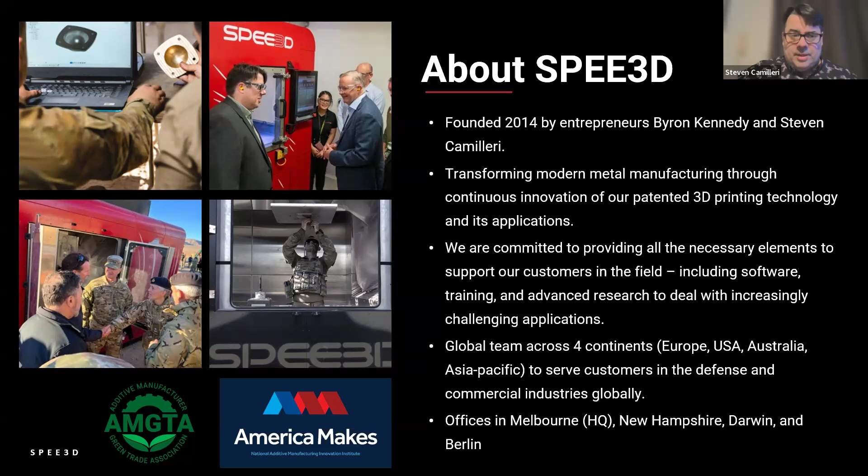So we didn't start in cold spray, we started somewhere totally different. I've got some pictures here of where we actually started. SPEE3D is our second company together for Byron and I. The first one was in electric motors.

This is a technology that came out of our work with solar cars, solar powered racing cars, where we had a world record for a little while. So what you see here is a swimming pool pump motor, which is boring, but includes a very fancy permanent magnet motor, which is derived from the back wheel of our solar car motor.

We shrunk it down, commercialized it. It's in production. We built the production facilities ourselves.

So, in short, we were tech guys that got bought out by a large manufacturing organization based out of Wisconsin, Indiana, in the US, and we went to work for them. They taught us how to do production. They made us set up the factories for these electric motors, which was an absolutely wonderful experience for tech people.

To be learning about manufacturing. And so this is our background, was this pump motor, which reduces your swimming pool power consumption by 80%.

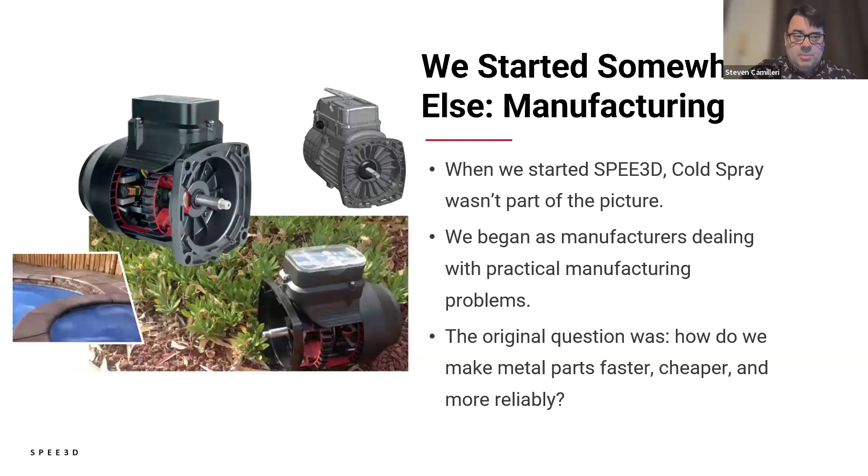It's actually a huge saving, enormous amounts of cost reduction for that new technology. It's kind of changed the world in swimming pool pumps, which is the saddest brag you can imagine. But there you go. So here are the problems that we knew in that industry.

So there's a large motor, it's called an integral horsepower motor. If you've ever been in a pump room or an elevator room, you've probably seen something like this. Very standard technology called an induction motor, invented by Nikola Tesla a long time ago.

So those motors include a lot of cast materials. By that we mean we take a molten metal, pour it into a hollow, let it solidify, and we pull the part out shaped like the hollow. So lots and lots of electric motor parts are made by casting, steel or aluminum usually.

As a result of working in electric motor tech and building factories, we had to learn a lot about casting. So much casting. The problem with casting is it takes a lot of tooling, there's a lot of lead time, it's very painful to change, it's not a very flexible process, and it can be quite hazardous. You've got to be very careful with it.

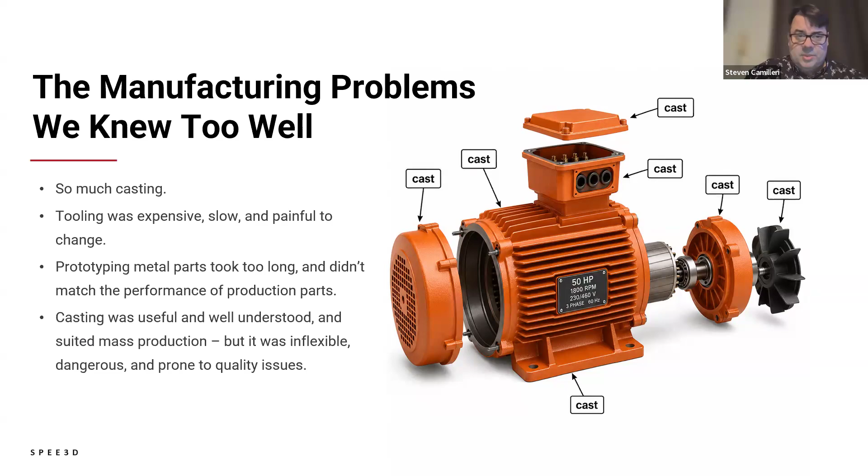So it's wonderful for mass production if you're doing the same thing every day. Car manufacturers have a lot of success with casting—they're making the same thing over and over again, every 15 or 30 seconds maybe. But when you're making stuff in a slightly lower volume with a lot of part mix, like electric motors, everything's a bit different. The front's a bit different, the size is a bit different. You're having to cast different things all the time, and it was a big problem. This was a big part of our life, dealing with this problem.

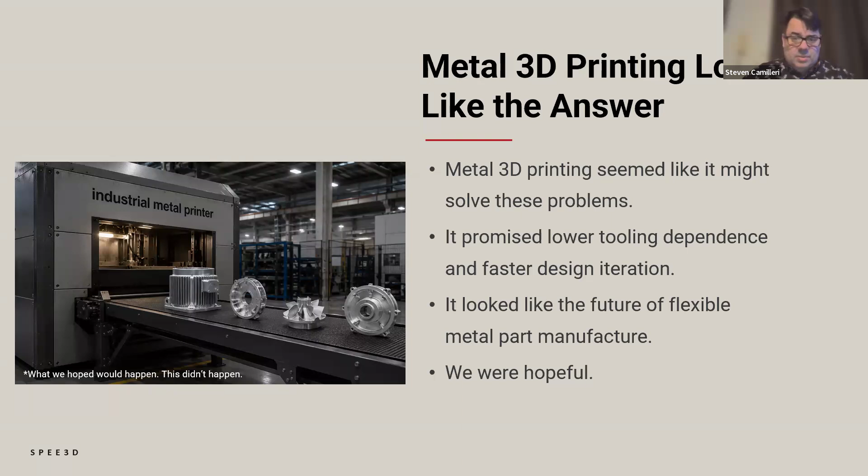So at the time, around 2013, we thought metal 3D printing looked like the answer. I made a fake AI image here of what we thought might exist, which is a big box—you just tell it what you want, and out comes the stuff on a conveyor belt. What we were really hoping was that metal 3D printing was going that way, and we could start to replace some of what we were doing with casting with a more flexible process that didn't require long tooling lead times. So we thought, let's get into this and see what we can work out.

So we tried it. It was very exciting, it was a lot of fun. We made a lot of prototypes. They generally worked pretty well, but it was just way too slow and way too expensive for solving normal manufacturing problems—we're talking orders of magnitude out in terms of feasibility. So that was quite disappointing.

We also noticed the parts looked pretty good. I've got some example parts on the table there, but they weren't normal parts—they were kind of thin-walled, small. Often you had to use lattices and things. You couldn't just make a big chunky metal part like we were used to for an electric motor. So for us, it was a bit disappointing.

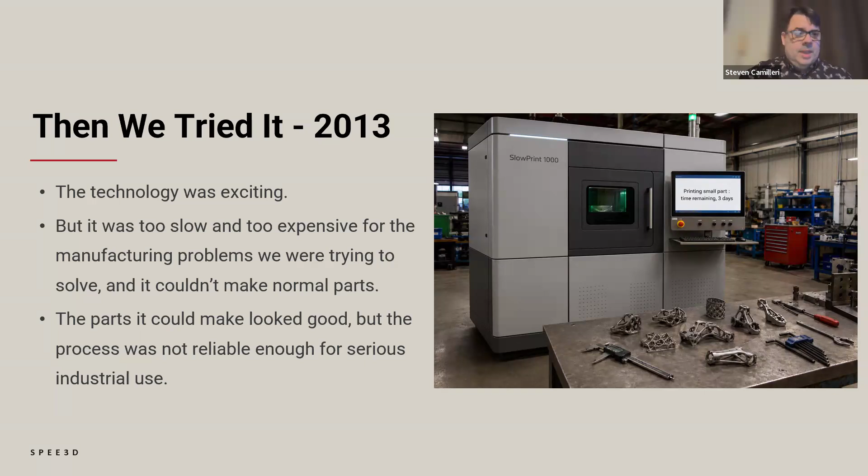So we thought, well, maybe there's an opportunity here actually. So we thought, let's get into metal 3D printing—what a great idea. Here is a lovely image. Most of you are probably watching the fancy video here and not listening to me, but I'll explain anyway.

This is a cross-sectional view done in a synchrotron with X-ray of an SLM style powder bed fusion process. You're looking at a powder bed and a laser going across the top, melting that material. In fact, you see it's not really a very nice process—you can see the particles jumping out, the molten globules jumping out, the powder going everywhere. So it leads to problems like lack of fusion and weld spatter inclusion. That's kind of how the process works.

For very small parts with thin walls, it's pretty good actually, and indeed they're getting better at using it—10 years later, they're getting better in other applications too. But this process of having to add heat until the material melts, wait for it to cool down, then add more material and add heat again to incorporate it into the part—there's this kind of thermal pumping cycle. You're pumping the material up to a liquid state, waiting for it to solidify, then adding another lot of material and pumping that up to a liquid state again. It just added time and energy. We noticed that seemed to be where all the budget was going—into this cycling between liquid and solid. So we thought, this is not going to work.

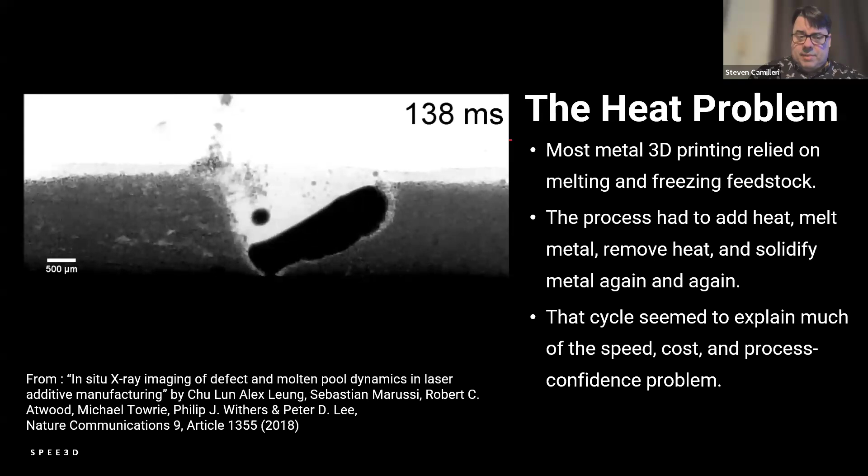We can't develop this tech to a point where it'll suit a manufacturing problem—physics won't let us because of this problem with the thermals. So we thought what we really need is a process that works in solid state.

So can we make metal parts without melting metal? So this was really the question that we went after. So we thought, well, if melting's the issue, then let's just figure out a way to make a solid metal part without melting the material. Easy, right? So we had a look around.

We thought something like powder metallurgy. So I've got a little description over here. You take a cavity, you fill it with metal powder, you press the metal powder down, and you eject this gear. Indeed, a lot of gears are made this way with powder metallurgy.

I've got to be careful talking about this because I know Brad's an expert in it, and he'll bite me.

But you take the metal part out, it's green, it needs to be heat treated to fully solidify and densify and shrink. But this is a way of making metal parts without melting the metal. So it is around. So what we need is something like this, but without all the tooling. So if only there was some way to combine all the powder together into a solid metal part without having to melt it. And we kind of despaired because we couldn't find the process.

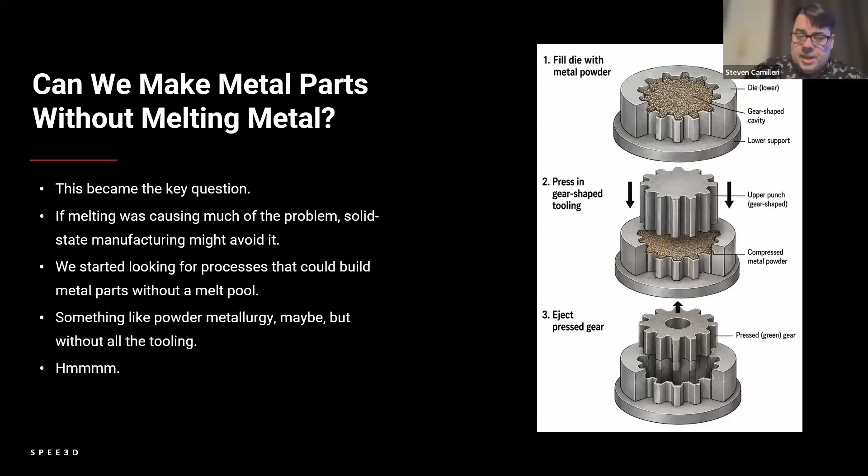Although I'm sure there are many people in the audience who have a suggestion. So, not a lot of practical candidates. Ultrasonic sheet welding, explosive bonding kind of came up immediately. This is 2014. None really felt like they were going to work for a kind of a production application. So, it's a little bit complicated. So we thought, if only there was a way we could do this.

Eventually, we found a really obscure reference to a thing called cold spray in this very, very old translated Russian paper. And we thought, cold spray, is that a translation error? What's this cold spray thing? So we looked around and looked around and we found out what cold spray was. And we thought, wow, this is actually the right kind of technique. Interesting. We looked a bit further and we found the CSAT community and we thought, wow, this is actually something a lot of very clever people are thinking about all the time.

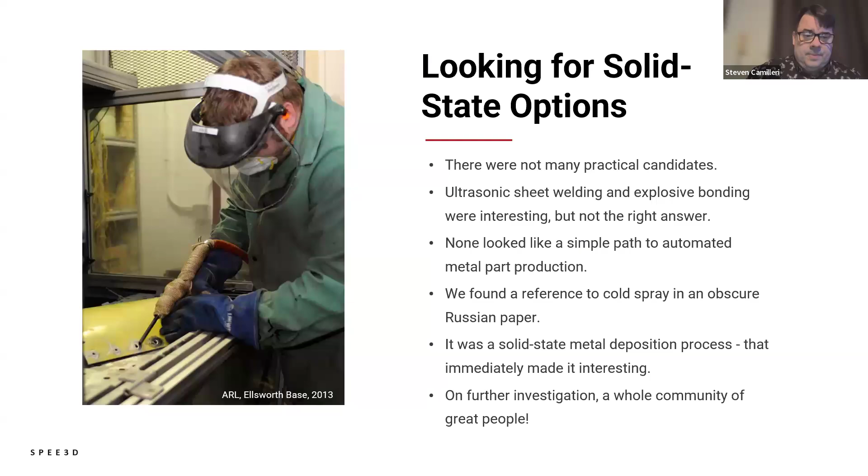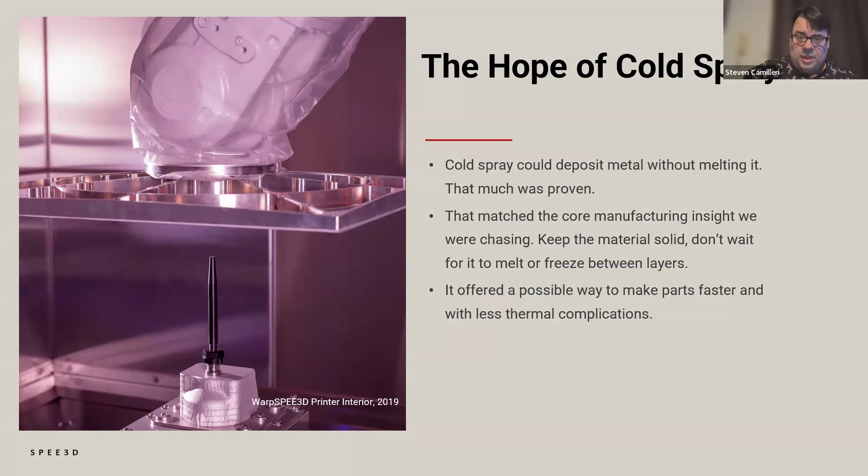This is wonderful. So, what we really needed to do was find this new application for it where we weren't just talking about manual repairs, building small structures, but actually trying to build really cheap, really fast metal components. So, our hope for cold spray was that we were going to be able to deposit the metal without melting it. That's good. But if we can keep it solid, we're not going to need to melt any of that metal. Great. Let's spray it on. Let's build the part up. Sounds feasible. Okay, good.

Here's where the problem came in. The problem was cold spray is a stochastic process. That's a fancy word for random. So there's a very random element to it. We're not controlling where every particle goes. We're controlling sort of a distribution of the particles. The way that the deposition method works is complex. It's a function of what you're spraying onto, what you're spraying with, velocity, temperature. There's quite a lot going on there.

It was solid state, but this whole idea of just being able to generate layer upon layer and stack them up was not really something that cold spray did. Cold spray liked to taper in. It liked to decrease in kind of layer area with every succeeding layer. And so we thought, right, we've got some work to do here.

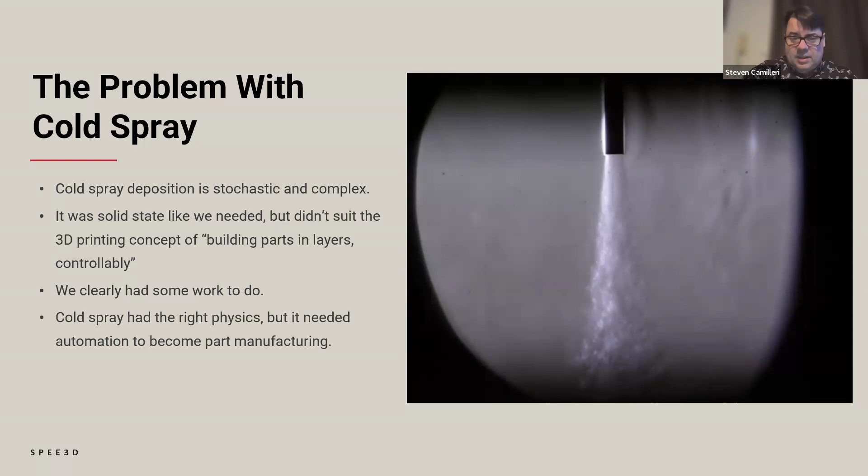So the good news was we were already people expert in real-time control, manufacturing, robotics, control systems, all that mathematical stuff. So we thought maybe there's a way to do this. We looked around quite hard. We didn't find anyone who seemed to have cracked this yet, but we were pretty determined.

So there's another artist's rendering of kind of our crazy idea. Let's take a robot. Let's automate the robot. Let's put a cold spray nozzle in there and let's have the robot generate the geometry repeatably and reliably. But that turned out to be quite a challenge. So really, when you think about it, you're trying to take these little tiny splats, which have this distribution, in a circular pattern, and you're trying to turn that into a repeatable construct, a repeatable geometry, by automating the process kind of really exquisitely. And indeed, that turned out to be quite hard.

So we worked out we needed to automate really every part of the process. We needed to manage every part of the process, control variabilities. The business of manufacturing really is about controlling variabilities, understanding where things can be allowed to vary because it might be cheaper or more convenient, and where you need to control them or you're not going to get the outcome you want. That's really the science of manufacturing. So we applied those same techniques to cold spray, and we spent a long time thinking that this wasn't going to be possible, actually. But nevertheless, we persisted. This was a very difficult process.

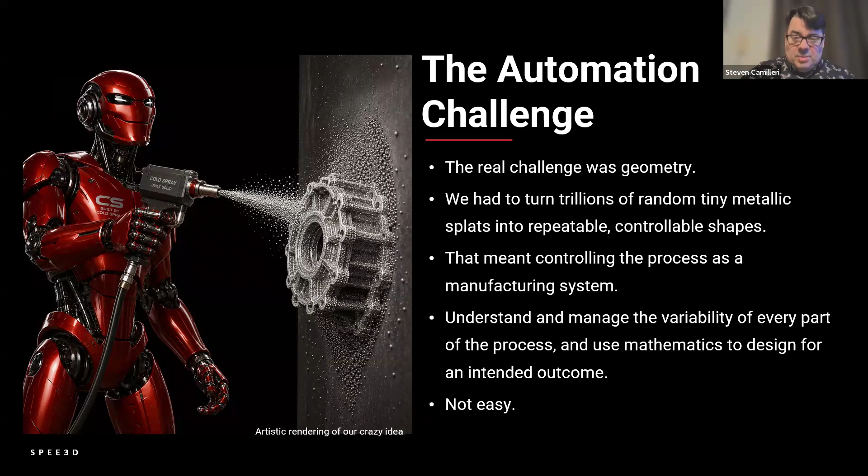So we worked out that we had to build everything at once. We had to build the machine, we had to build the nozzle, we had to build the robotics, we had to build the software, all the automation for controlling everything safely. We had to build all the simulation tools, all the compensation tools, all that real-time control. And really, we had to do all this simultaneously in order to get that predictable, reliable outcome that would allow us to be able to deterministically manufacture something every time we wanted to.

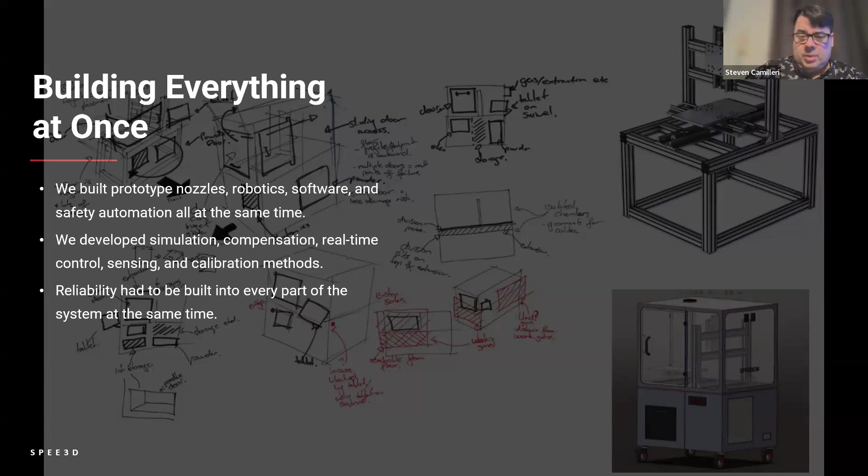So there was a lot to control. Fortunately, we had a very good team, and this was kind of our background, working in these very kind of multi-physics type problems. So what you can see here is one of our very first printers. We call this one Blackbird. We've still got the prototype in our office. Anyone who comes to our office, we'll show it to you. It didn't work. It was missing some very important features that we worked out we needed, but we learned a lot. We learned what we needed to know by doing a lot of work with that system.

So in our old office, we had this wall. It was probably about 20 feet long. We're just showing a small section of it here, the wall of failures. So trying to automate cold spray led to a lot of very interesting shapes. I'm sure we have a lot of people on this call who are expert in manual cold spray and know how to generate geometries. My hat's off to you guys.

This is a process that's not particularly intuitive, I think, and it's a real skill to be able to do that work. It's not like painting, which is relatively straightforward. You're just essentially making a two-dimensional sheet. Cold spray, what you're putting down depends on what's already there. And it's quite complicated, actually, to predictably make something.

So we had some fantastic looking parts. They weren't useful parts, but we had parts that looked like they'd been eaten by termites. We had parts with spikes and growths all over them. And indeed, we had to work out why that was happening, establish controls, and spend a lot of time iteratively developing those automation processes so that irrespective of what geometry was being thrown at the system, we didn't have those kinds of failures. So there's a huge amount of work, a huge amount of labor and effort in this.

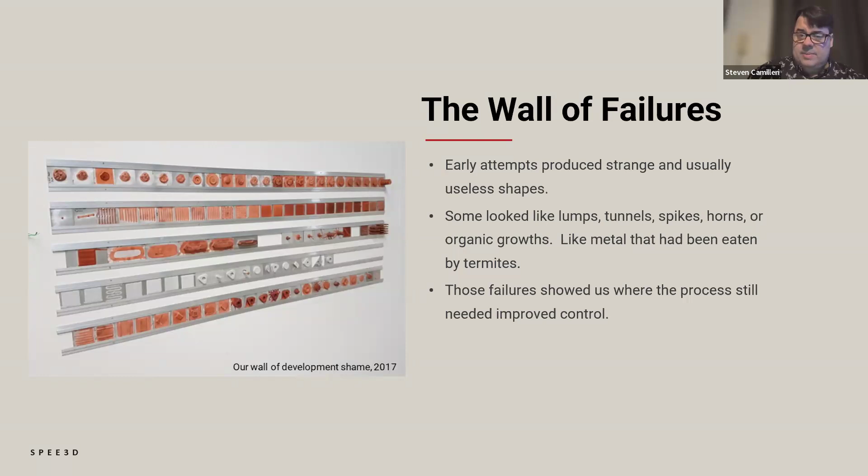So this was our first big success, 2016. It's a cube. So it's a pretty unimpressive, ugly little cube. It's only a centimeter, so it's about half an inch to a side. But the walls are flat and they're at 90 degrees to each other, and indeed it has edges. And the edges are relatively sharp. So it was a crazy amount of work getting to the point where we could make this ugly little cube, but we were very, very proud of it.

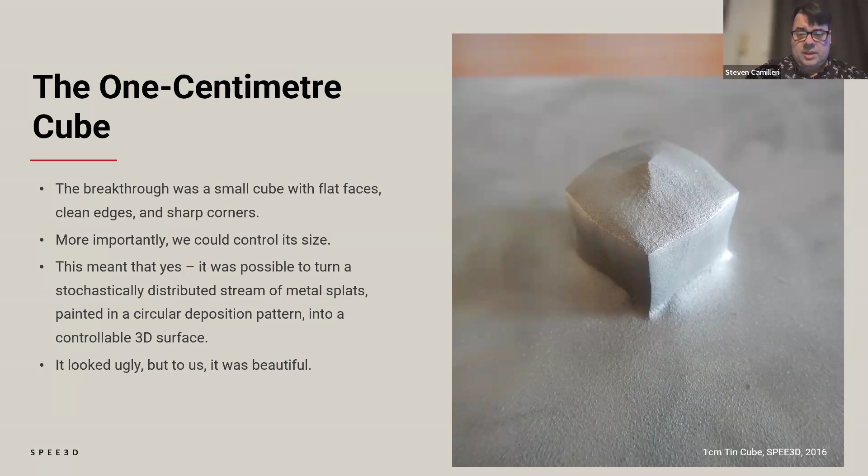So most importantly, we could make that same cube over again. We figured out how to make the top flatter. And indeed, if we wanted to make another one, it would look just like this one. And if we wanted to make a larger one, we could do so without knowing how to do it in advance. Our automation would allow us to do that. So that was our first big success, probably about 10 years ago, as we sit now. And it was tin, of course, because our prototype nozzles that were running in our garage were very low energy. So tin, you can just about sneeze tin together. It really doesn't need a high velocity.

All right. And about a year later, we brought out our first product, LightSPEE3D. Some of you know this product well. This will make parts up to about 10 pounds. And this was us taking all of that tech, compacting it into an artifact and wrapping it up in a way where people could easily engage with it. So indeed, you could take a part that the process had largely never seen before, and if it met the design rules, you could print it fairly quickly. So why could you do that? Because of all the automation. The automation is really what allows you to do that.

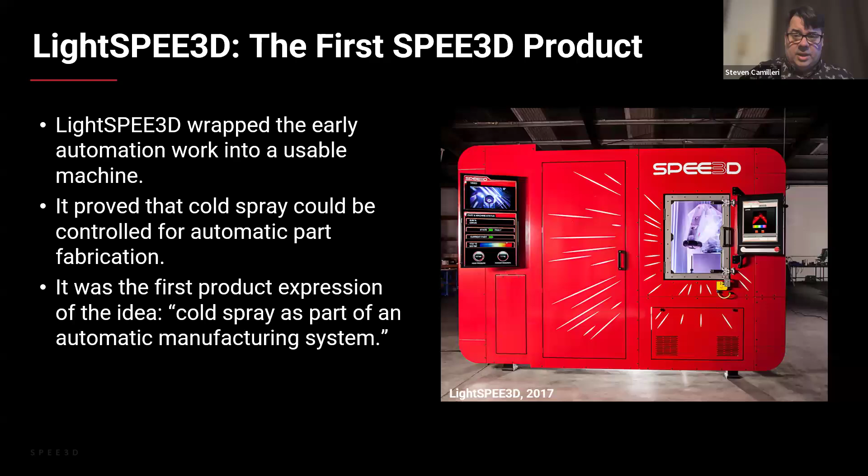So generally, here's how the process works. Our objective function is to compact the time from need to the part being available as much as possible. So that includes the design time, the setup time, kind of project time, as it were, the printing time, but also the machining time, the heat treatment time. So generally, we heat treat and machine every part that gets made with our process.

So we print that, we stick it into a furnace, we cook it to improve the alloy, very much like you would do with powder metallurgy, and then we finish it with machining. With our new high pressure systems, which you'll hear a little bit more about at CSAT, we don't need to heat treat as often, but many of our alloy systems work extremely well with heat treatment, and usually that's the right answer.

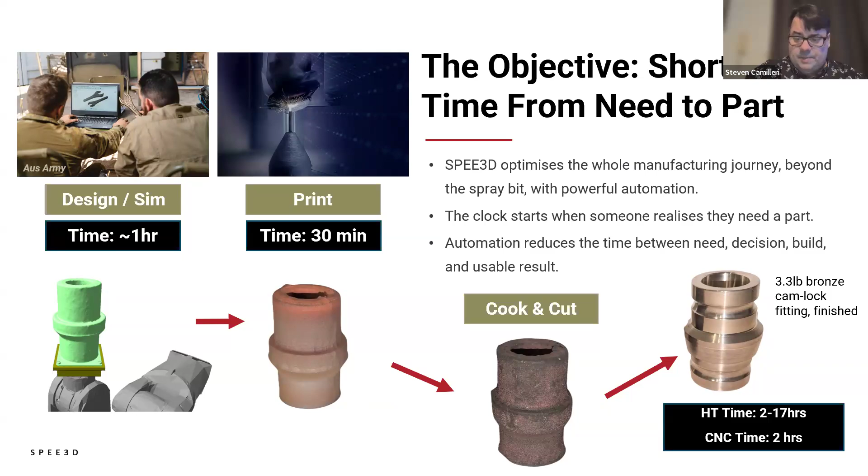So let's talk about TwinSPEE3D. TwinSPEE3D is the name of our software. Those of you that have our system will know TwinSPEE3D well. It's really our PC software that allows you to manage the workflow for the printer. So you would do all your part locating, and you would do all of your simulation with TwinSPEE3D.

So we have two primary workflows there. One is for printing, where you take a geometry that doesn't exist and then you make it exist with TwinSPEE3D. Or in fact, you can take a substrate geometry, which is usually just a flat plate, add the part you want to be on top, and then have it generate that part. The substrate doesn't actually have to be flat. The substrate can be a part already, and you can make another part joined to it. TwinSPEE3D doesn't really care.

Separately, we have a coating workflow. When we say coating, it's not really the same thing that you would normally do manually, for example, with a cold spray nozzle. With coating, we would normally take a shape that already exists, which can be a fairly sophisticated three-dimensional shape, and we can use the printer to apply a coating automatically, like paint that surface to a given thickness. We don't use that workflow as often as I think is justified, but nevertheless, it's something that the software does, and it does solve an interesting set of problems to be able to automatically paint like that.

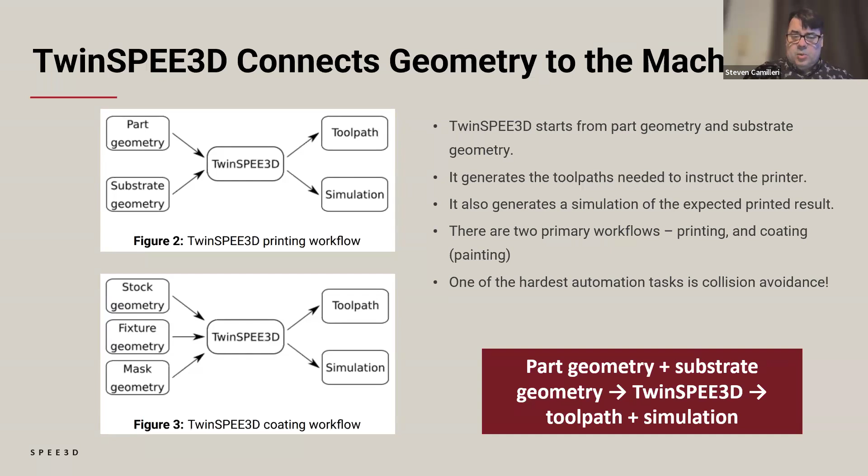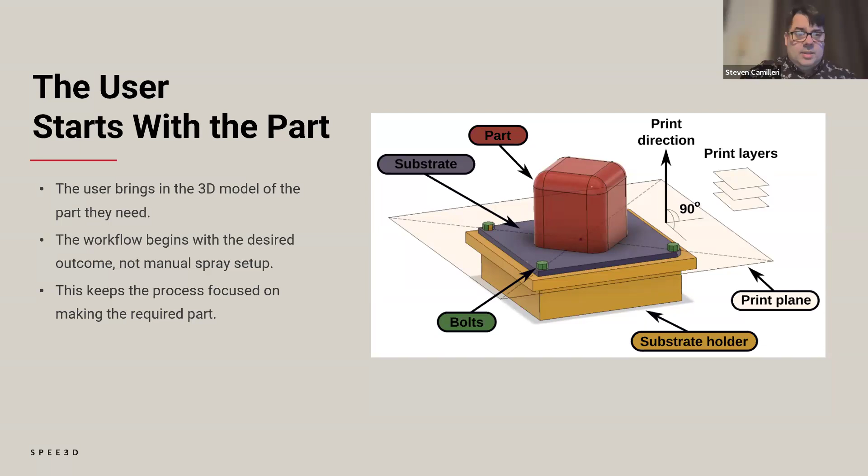So interestingly, the substrate is part of the process. It can be a plate. It doesn't have to be a plate. For example, if you had a small statue of a dog and you wanted to print a hat on top of that dog, maybe in a different material, you could do that by bringing the dog in as a substrate and then adding the hat on top, and it would automate that workflow for you.

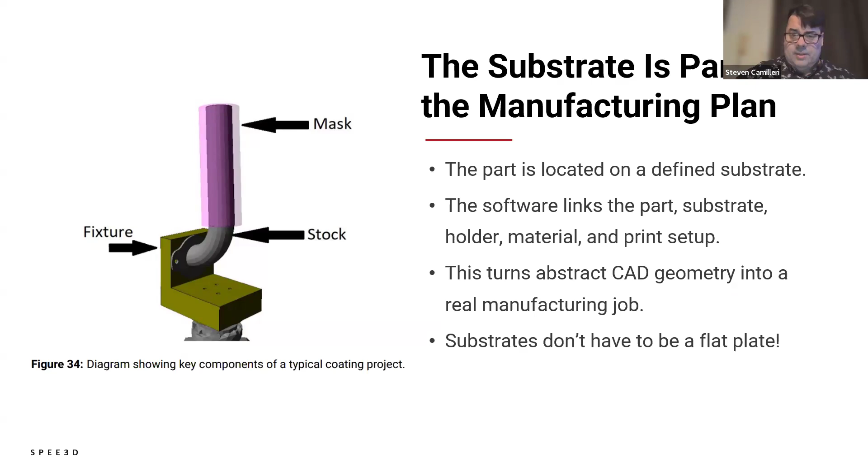We also have automated design rule checking. So there are design rules. We have a document in the manual that talks about what kind of geometry is allowable. As you build up, what angle can you build outwards at? Because if you're building up and you're building very close with a tiny gap flat to the substrate, that would be very difficult to do. You'd need to get the nozzle around behind the substrate to achieve that, which causes an occlusion issue.

So what's the process for building that part up, and indeed, where are their limitations? Sometimes it's difficult to intuitively tell where in your geometry there might be a limitation. So we've built automation into TwinSPEE3D directly, which will do design rule checks and then highlight the areas of the component where there is a design rule failure, and you can change the geometry prior to printing just to ensure that it does print properly.

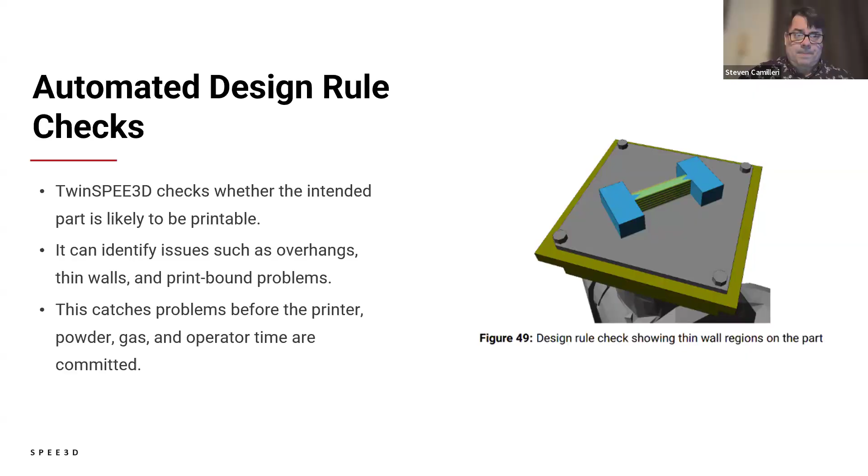So this is a genuine part that we made recently. Someone was leaving who used to bring their dog in regularly, so we made a statue of their dog for them.

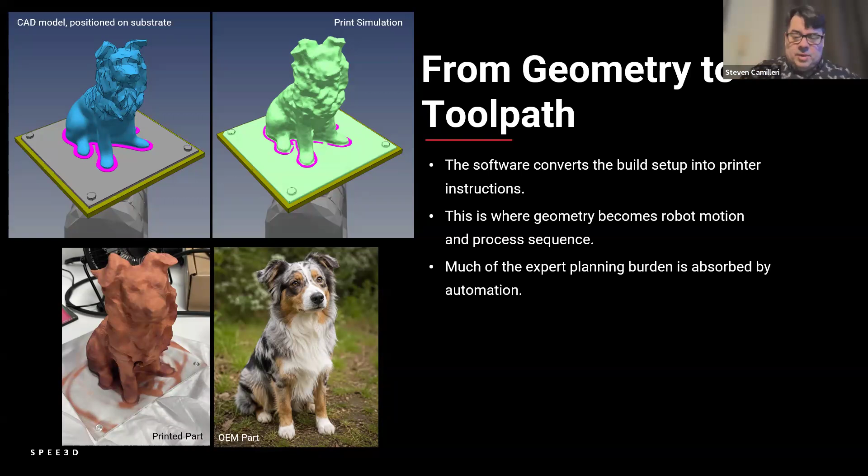Bottom left, you can see there's a copper dog statue that's been printed, which matches that green simulation quite closely. It's a slightly different angle, but it does indeed match. And then, of course, we've got the reference design down there at the bottom right. So, yeah, the simulation turns out to be quite an important part of the process.

So the real challenge here is most of the time, our technology is asked to make a part that already existed before. So, for example, we're making a fitting or a coupling or a bracket or something, some sort of armored vehicle component. And the people who originally designed that component wanted to solve a particular problem, and they had certain manufacturing tools at their disposal, which were not cold spray.

So we have to re-engineer that part. We have to solve the same problem, but we have to switch to a cold spray manufacturing process in order to make that part. And the people who originally thought of the part didn't have that same constraint. So we need to solve the problem, generate the new geometry that's cold spray printable that solves the problem.

And the simulation is really useful from a point of view of, it's a very complex, intractable problem. What's printable? We've got all this real world problem to solve. And indeed, tracking what's printable and what's not beyond intuition is very difficult. So having the software deal with that for you is quite helpful.

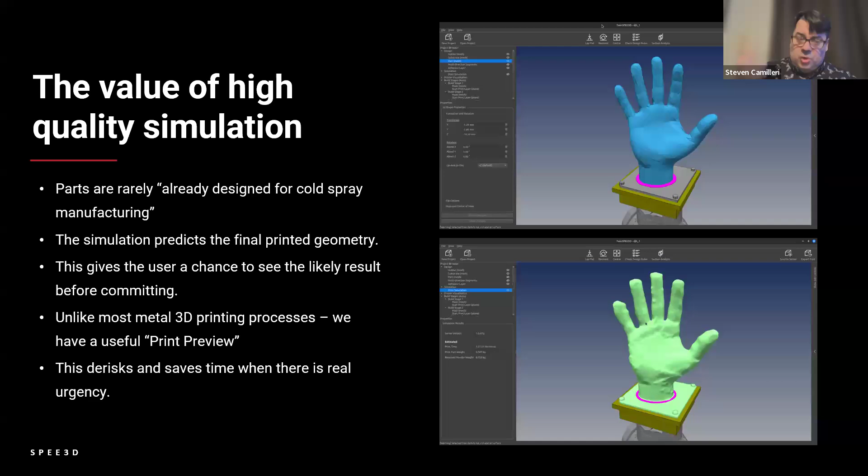So the print preview tool, essentially the simulation, is kind of a what you see is what you get. So you can very quickly say, what if we tried this? Does that part simulate in the way I expected? If I were to have that in my hand, could I solve the problem that's in front of me?

So most metal 3D printing processes don't have that print preview, which to me just seems off. If you really want your metal 3D printing process to be helpful, you should be able to predict and tell people what it might do, just as you would with a word processing package. So really, it's all about generating the answer to that problem very quickly.

So you'll see also in the top view there that blue hand, the original CAD, is a lot more detailed. This is a very small part. It's only about this large, and indeed, the resolution of the nozzle is limited by the inside bore of the barrel.

That spot size of printing is right on the edge of what's really printable with that nozzle size. But you can see down the bottom there, it's done a pretty good job replicating that geometry, though not exact. Our automation process in general tries to overbuild the part, making sure there's more material than needed, because once it's printed, taking material off is relatively easy, but adding more is not. So we bias it in that direction. It doesn't always get it right, but that's where we bias it.

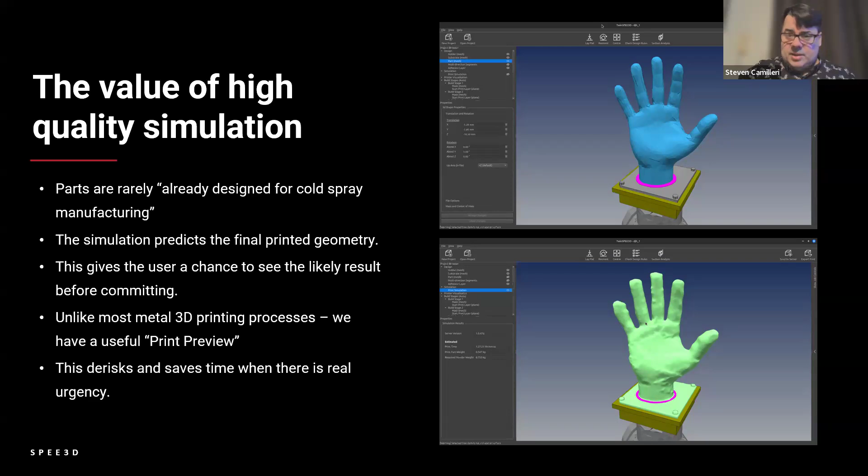So the simulated parts can actually be compared very directly with printed parts. The simulation process, again, isn't perfect, but most of the time it's an exceptional guidance for the real part.

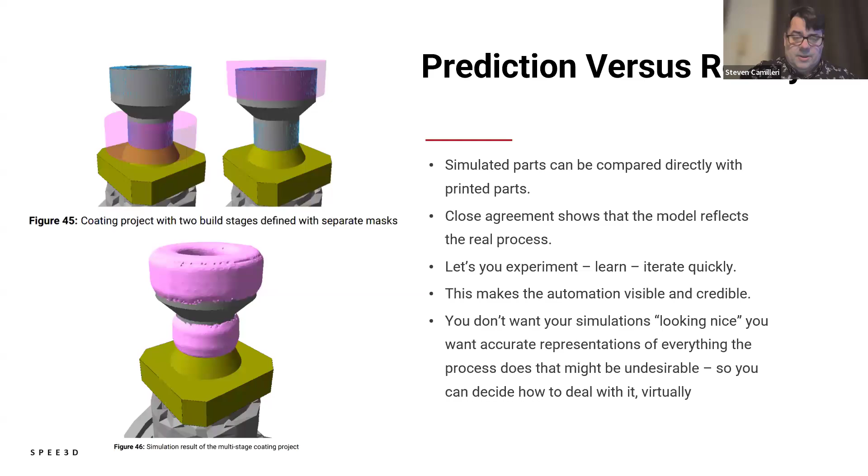So the automation really is covering a lot of ground here.

When you think about what's actually going on in the printer — in this case the nozzle is stationary and the part is moving around. For our WarpSPEE3D and XSPEE3D printers, that's how it works. For our very large format Titan printer, it's the other way around: the nozzle moves and the part is stationary.

But the automation has to deal with making the geometry — that's step one. Then making sure the geometry can be knitted together as intended. We've also got to account for all of those joints in the robot. How do we get all those joints in the right position so we end up in the right place? We're not tying the robot up in knots, and we're not driving it into blind alleys.

And how do we deal with things like collision? Collision is actually a very complex issue for an additive manufacturing machine because you're literally adding material. The system can collide with the material that it's added and destroy itself. During prototyping, this happened to us a few times.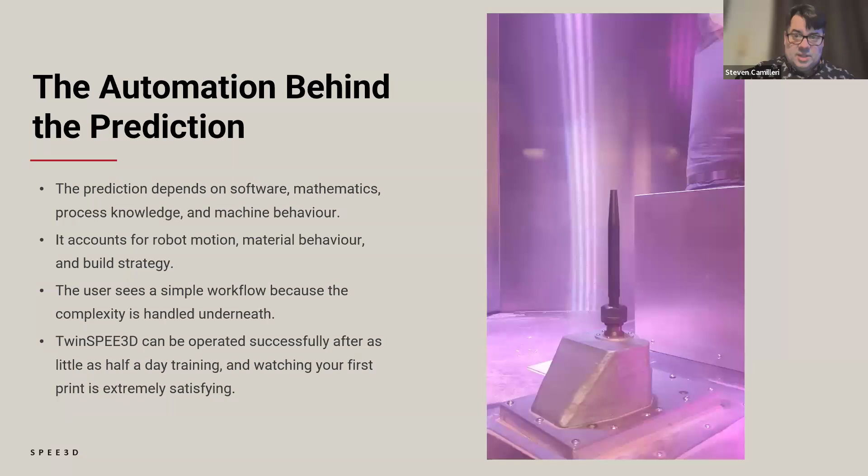Think about something like an FDM polymer printer — it builds up material very carefully in layers so the nozzle doesn't crash into the part; the nozzle's always got clearance. In our case that's not necessarily true because we have a 6 degree of freedom robot. It's quite possible to get that robot to crash into anywhere in the printer, essentially at any time. So we've got to manage that issue of collision as the part's building up. There's quite a lot going on under the hood, as it were.

Talking about geometry that's hard to build — we have a process called automated build planning. In the case of the hand, you can see that inset picture: the hand is split up into different colors, and every one of those colors is subject to a different build plan. The system will reorient itself in space, set up a new datum, and build up at a different angle. That's all done by automation.

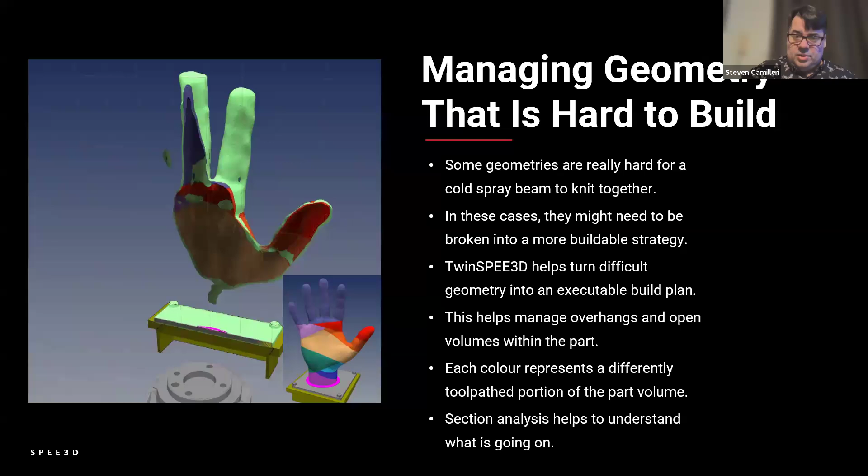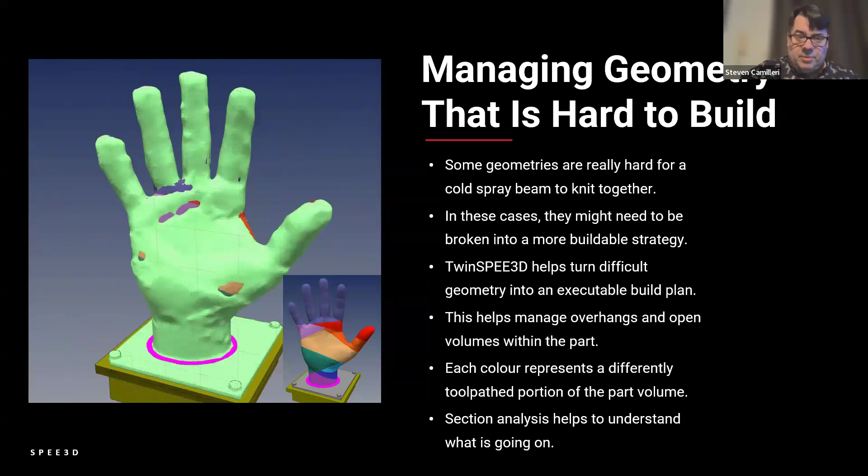We've also got section analysis — you can see us sweeping through there, and the different colors of those different build paths within that green. You can also see, when it resets, a few sections where the simulation is still lower and the underlying geometry is still showing through. Section analysis is incredibly helpful when you're in the moment, you haven't got a lot of time, and you've got to solve a problem: what is it I'm looking at, and where might it be a problem for me later? Being able to do that live sectioning is very helpful.

Our next element here is Harmonica. Harmonica is a code name for our user interface — this is what you see on the printer itself. We set it up to be three-dimensional, high refresh rate, and very visually appealing, really to make life easy when you're in the field. I've done a lot of work in the field — you're being attacked by insects, it's hot, you're sweaty and tired, maybe working under a red light. You really want the cognitive part of your job to be simple; you have a lot to worry about. So having a very well-designed, visual, easy-to-use interface is quite important.

So we call this part of the system Harmonica. Down the bottom there, you can see where it's located on an XSPEE3D. We'll have one of our XSPEE3D printers on display, I believe, at CSAT this year, so you'll get to see the whole process in action if you're there.

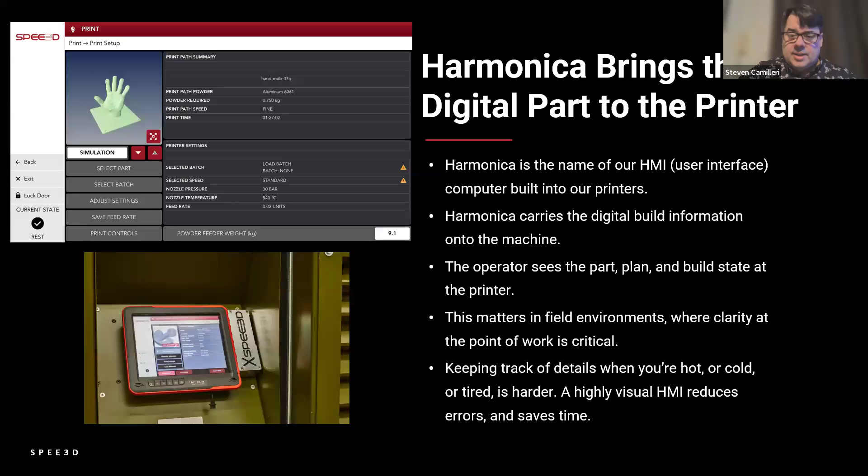So let's talk a little about the use of technology. Technology really only matters when it solves a real problem.

I've got this innovation adoption curve, or technology maturity curve, on the left here. This is off Wikipedia, there's a page on this if anyone's interested. This is the distribution of people in the world, and indeed, the people who love innovation is about 2.5%, 1 in 40, and 39 in 40 hate innovation.

So this is important to remember when you're trying to convince people to work with a new tech: most people don't like that change. So the tech itself doesn't really have value to people. People need the tech to solve a problem, and the solution has value to people. So there's a subtlety here that's important to know.

If we're talking about automation for cold spray, we really need to find those people whose problem it will solve. And in our case, it's urgent access to metal parts.

Just as an example, I like tech. I'm one of the 2.5% of people. I would adopt tech even if I didn't think it solved a problem yet. Most people are not like me. So example would be horses.

I quite like horses, I think horses are very interesting. I would never own a horse. I would probably ride a horse. I quite like being around them, but owning one is not for me. So I'm in the 39 in 40 for horses, but the 1 in 40 for tech.

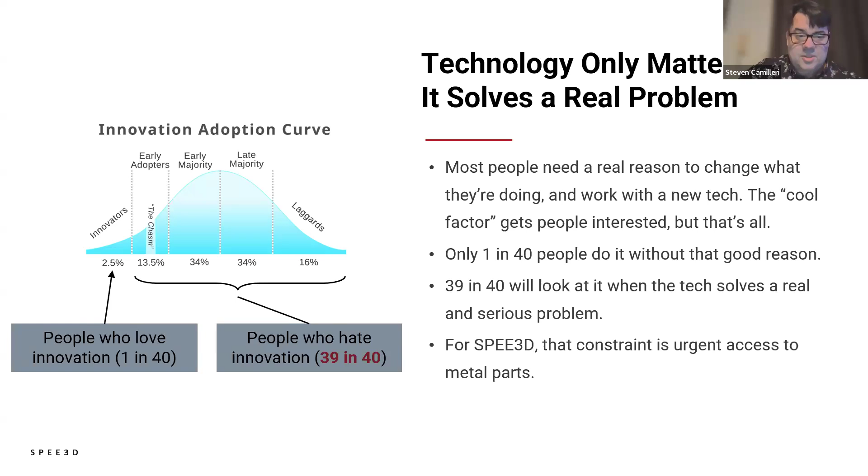So yeah, most people want the outcome. There's a picture of us out in the field, you can see what the environment's like where we're typically working.

The people that we're working with really don't care about cold spray at all. They care more about rapid part manufacturing, but what they really care about is being able to avoid downtime and loss. So solving that problem for them is the real answer.

So cold spray is a central part of what we're doing to deliver that for them, but it's not everything. Our automation actually is the part that they see and experience and value in the work that we do with them.

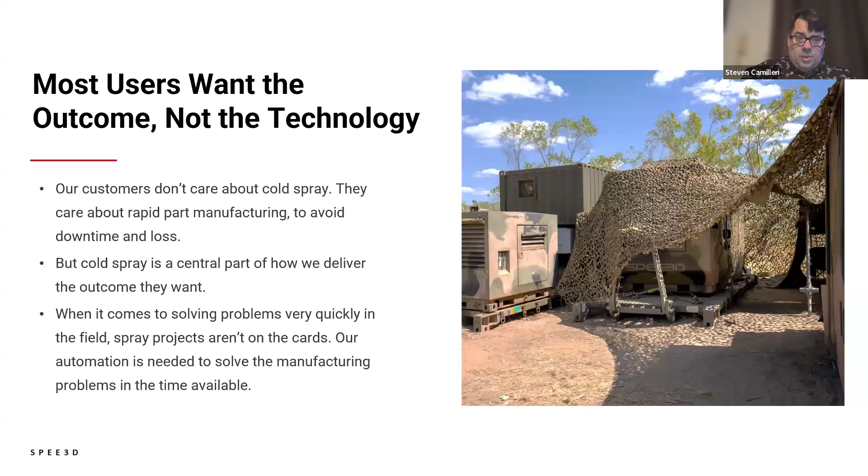By comparison, cold spray repair, cold spray coating, most people at CSAT are there for that. This is actually a totally different beast to what we do. So this is a fantastic thing. Whenever I see this picture of the S-92 Vic's work, I believe I'm very impressed.

But this is not what we do. Our system doesn't know how to commence surgery on that part, doesn't know how to prepare it, and indeed wouldn't be able to generate a custom restore like a manual operator with experience would be able to do. It's simply a different task.

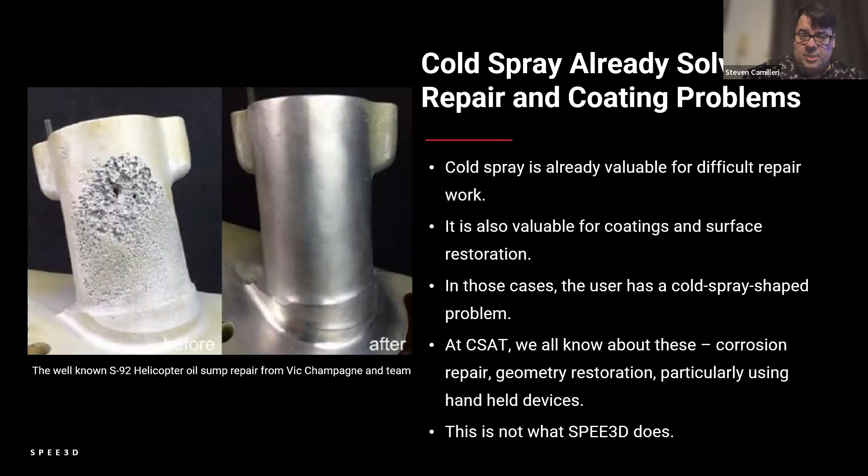So for reference, this is not what SPEE3D does. We don't work in this industry. What we do is go out with people who have limitations, who really need parts, and we provide them with a system that allows them to rapidly generate parts.

So there aren't too many people in that industry who are excited about cold spray. We are. What they are excited about is the automated manufacturing.

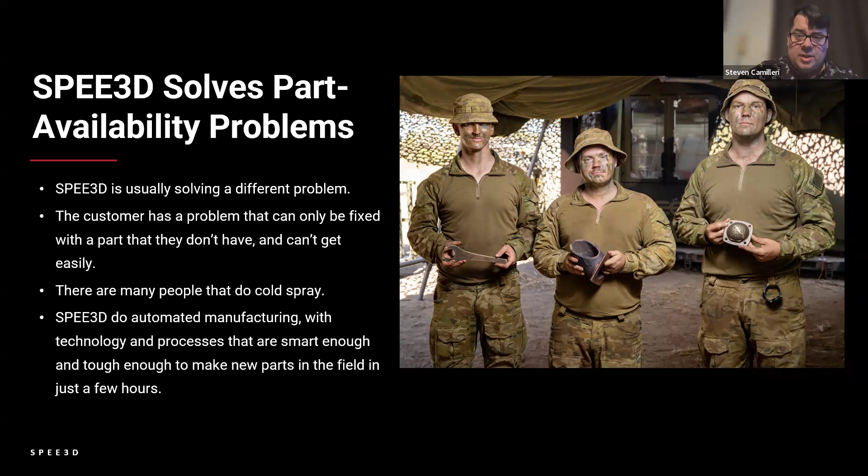So automation changes the answer. Really, it's about removing the burden of the operator. So the human's job is to work out what should be done.

That might change in the future, but right now: which part do we need? What's the priority order? And how quickly do we want it versus maybe how high a quality do we need the outcome to be? These are the kinds of decisions a human would make. A human understands the operational requirements, they will understand why you would do something.

Second point, our software and automation does all of that complex planning to create the part. So the how of the process is all done by that automation, so the person doesn't have to carry that load around with them, which in the field is very, very important. They simply need to understand what the nature of the problem is they need to solve and have the automation deal with the project element of it automatically and quickly.

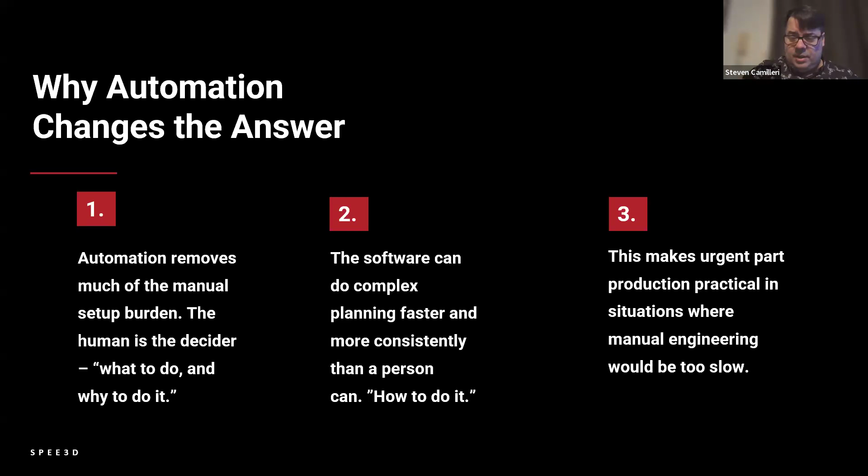So this really is a solution for those problems where the project type process would be too slow. So here's an example: we did this at REPTX down in San Diego in, I believe, 2022. So this is a valve body.

It's about this big, about 12 inches left to right, maybe a little bigger. So it was quite a hard challenge.

They essentially said, we put the system on a ship. We're going to pretend that the ship's been hit by a torpedo and that the seawater extraction system that would otherwise be venting the seawater from the hull has failed. There's a part that you need to generate within 4 hours or the ship will sink. We thought that was pretty tough, but that was what they wanted to try.

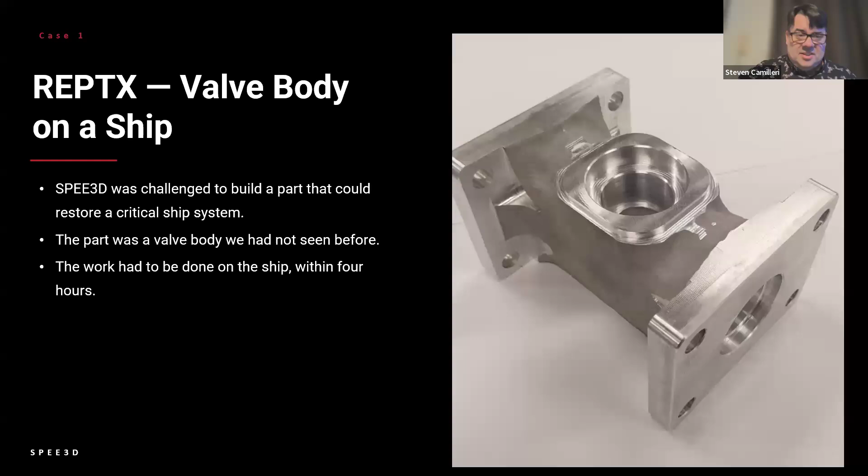They wouldn't give us the part in advance, so they started the timer and gave us this valve body design, and we were able to generate that within 4 hours on the ship. So printing, heat treating, machining, pressure testing, all on board the ship.

That was I'm not going to tell you that was fun. That was quite a stretch to be able to do that. But being able to do that is a new thing. Creating a custom part to save a sinking ship that you didn't know you needed before the ship was torpedoed. I think that's a new thing that didn't exist before, but we were able to demonstrate that we could do that now.

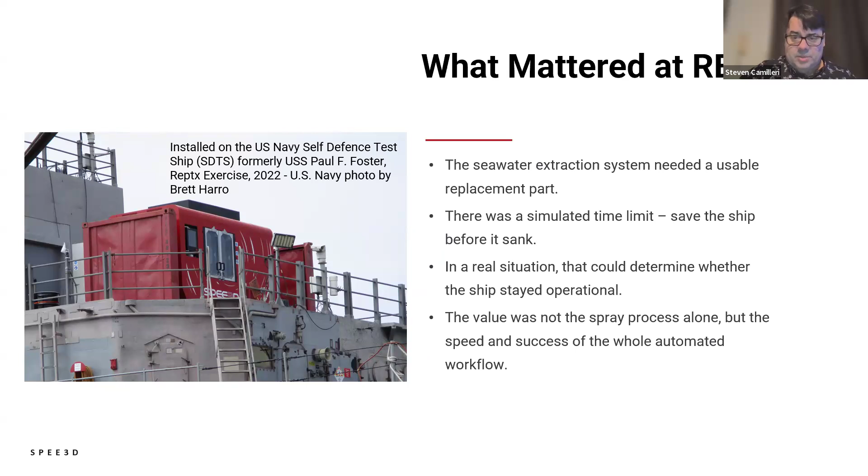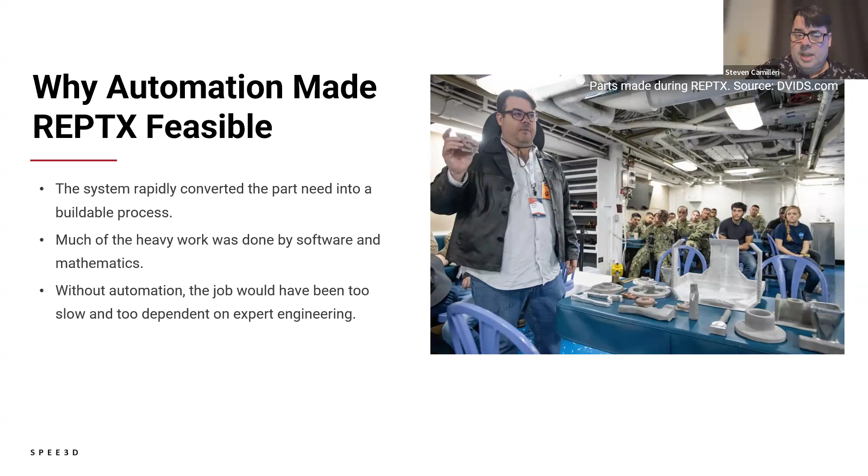The automation meant that we could solve the problems that were coming quick enough for it to be relevant, quick enough for it to be important. The software and mathematics really did all the heavy lifting for us. If we hadn't had that, even if we'd had our very best people there and they'd had all the coffee in the world, we wouldn't have been able to solve those problems in a period of time that was important to solve the problem.

Here's a second example. This is a tool we built for a platform called HIMARS, in Australia, a very remote part of Australia. There's a tool used to lock the wheel hubs on a wheeled HIMARS. It broke in the field. This was a critical demonstration, the very first HIMARS in Australia being demonstrated to the Australian government, and embarrassingly, that tool failed.

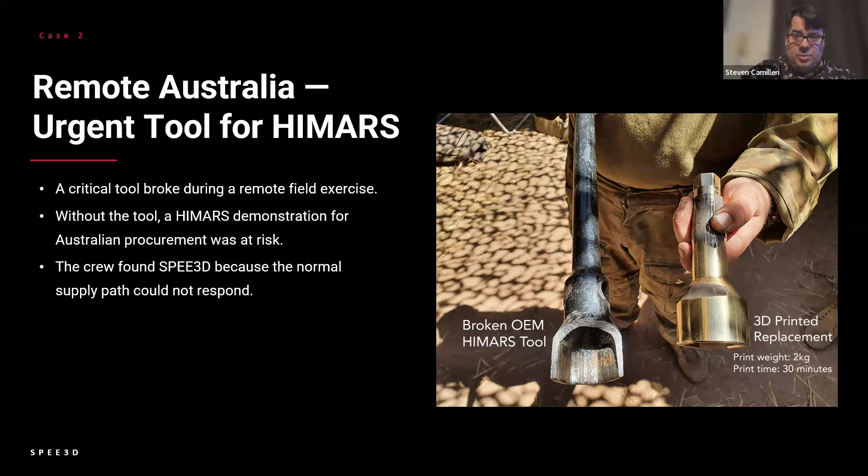It's got a nasty cast iron material, very brittle, and it had a checkered history. The first time I tried to use it, it broke. Without that, there was quite a lot riding on this test. So people came and found us and said, drop what you're doing and do this instead. And we were able to produce that replacement part.

Here's where that was, the Bradshaw training area, 400 miles to the nearest Burger King, just to give you a reference. In Australia, Burger King is called Hungry Jack's. Anyway, there's a long story there, but we do have Burger King, it's just not called Burger King. So 400 miles drive to get to there. This was really remote, right in the middle of nowhere.

And this platform had a problem. It wasn't a big problem, but it was stopping the platform from working. So we made that part, and because we were there, because we could make the part, there was a big impact. And indeed, Australia now has the HIMARS platform and uses it as part of its defence strategy. That was announced in the national news. Nobody heard our part of that story, but now you guys have.

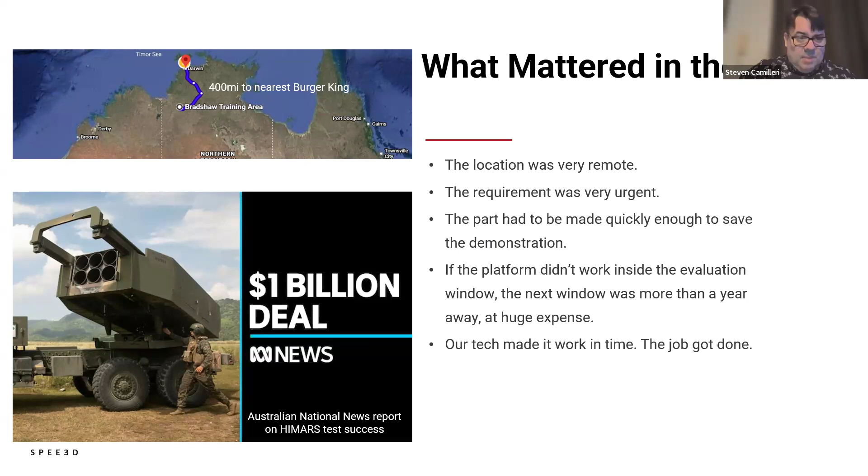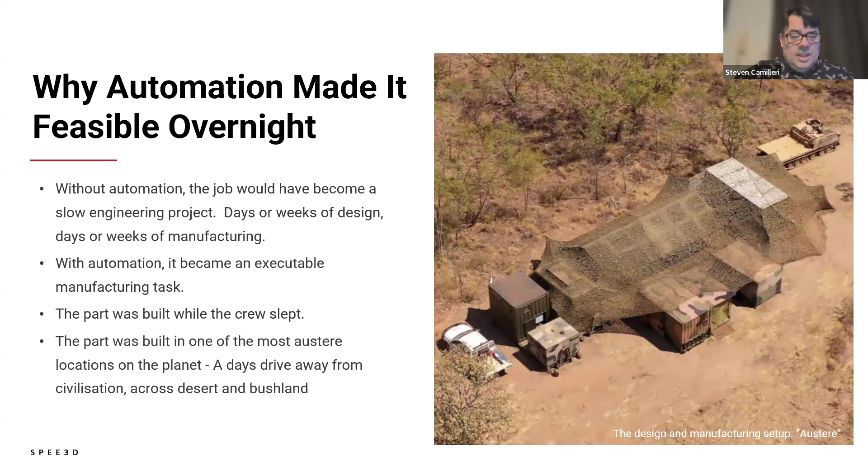This was a really austere environment. You want to talk about austere environments, I mean this was like Death Valley. This was hot and uncomfortable. That sand on the ground was like talcum powder. You would arrive in your vehicle, hit the side of it, and 100 pounds of dust would just collapse off of your vehicle. Very, very tough environment. That was where we solved that problem for the HIMARS.

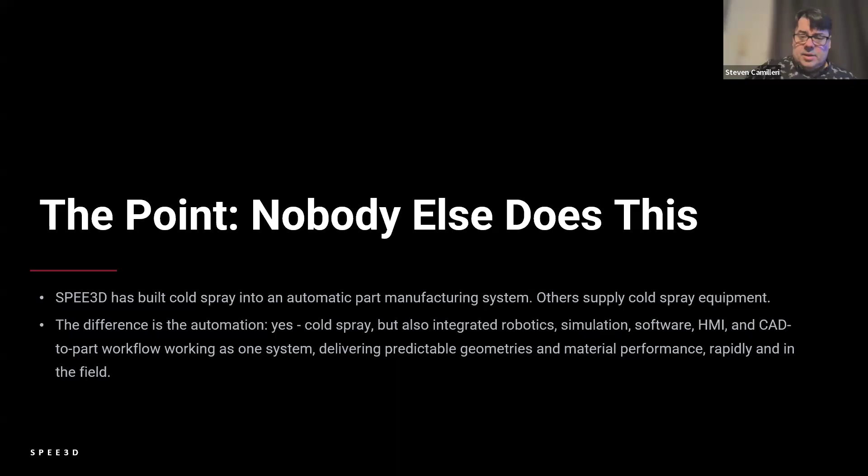So this is what we do. SPEE3D does automatic part manufacturing. It's 3D printing, sure, but it's maybe a little more than that, because we have this very high degree of ruggedness and automation so that we can solve real problems in the moment. Cold spray is a very important part of that, but for us, it's just part of the integration. So yeah, that's SPEE3D in a nutshell. Does anyone have any questions?